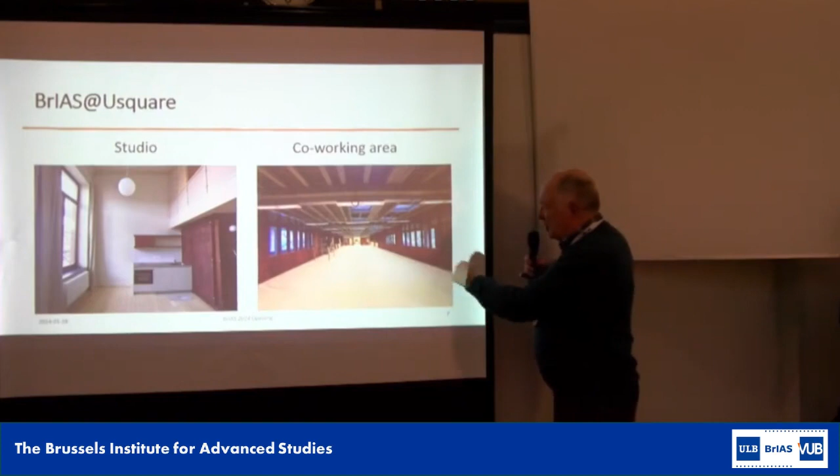I have just a few pictures to show you the actual state. They're being renovated. You see a studio - this will be the co-working area. This will be an ideal setting for people to live together, to work together, to interact, to discuss, etc.

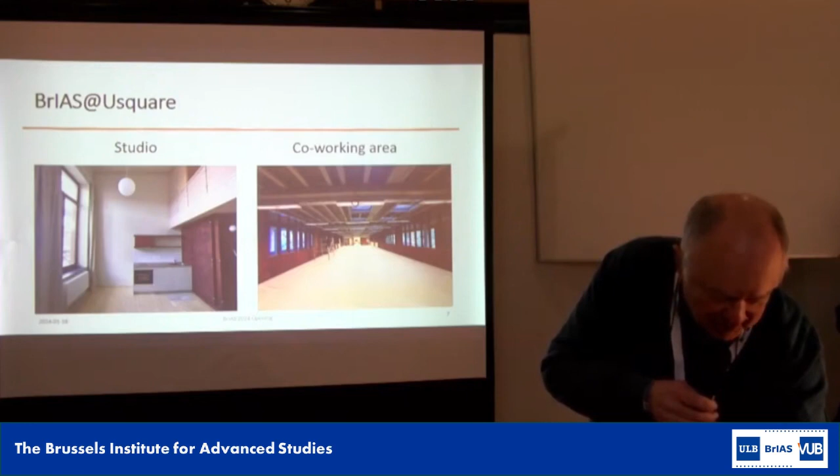So we really look forward to the new setting, which will be available, as I said, probably from May on, and certainly December. Now, I wanted to keep it short. I did not resist on showing you a robot snowman. And by special request, I also show this drawing, the illustration for the last workshop, normally, of BrIAS in May on agriculture. Apologies to the artists in the room for the quality of the images.

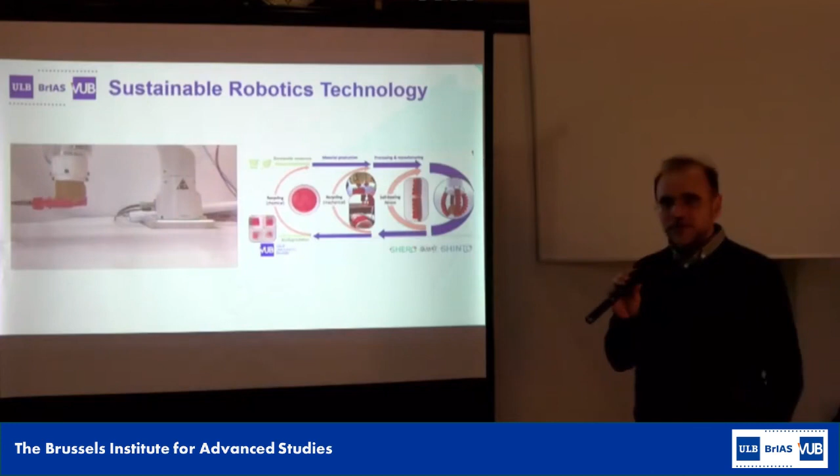A second subject, and here some other video concerning what we mean by sustainable robotics technology. Here there is work from my colleague Bram Vanderborght from the VUB concerning robots that can self-heal, so that they can inherently last longer and survive injuries and bad treatment, and at the end be more sustainable in terms of usage.

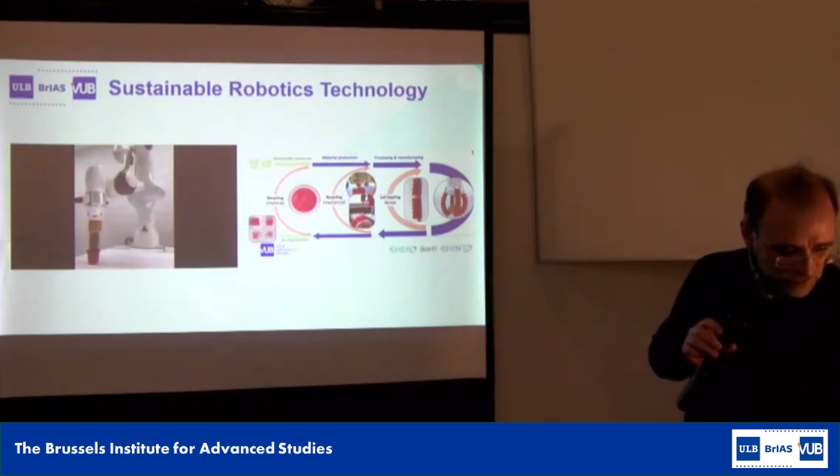Fourth subject, as we said, war and peace and robotics. The previous videos and images were all work done either in this lab or in the labs at VUB. This is the only image in the presentation that comes from the internet because we don't work on this kind of application. But we believe it's important to raise awareness and understand that there is a complex debate concerning the use of robotics in war.

That's a debate that cannot be left only to professionals of politics. It's a debate in which academia must have a role, must bring its position, its viewpoint, and actually must also be the place where different opinions meet and where we can have a constructive dialogue on the subject.

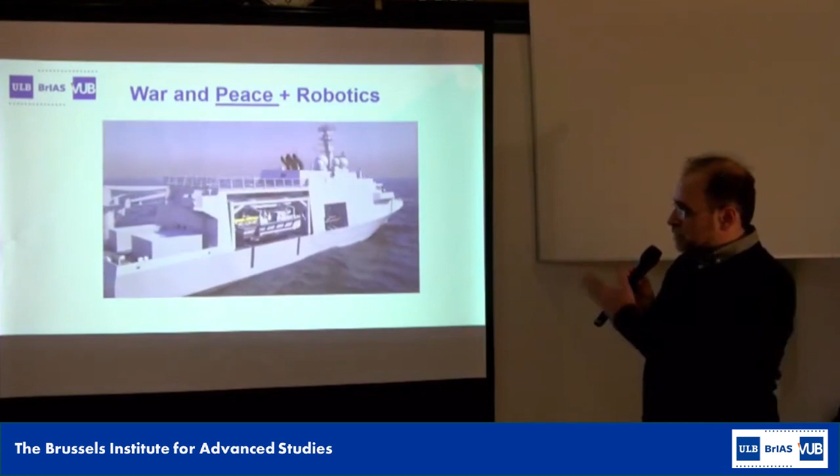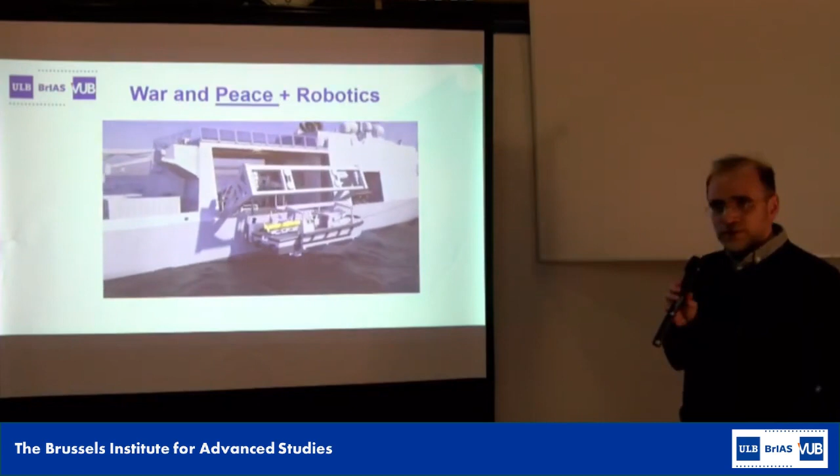This is basically the new generation of minehunters of the Belgian Navy. The idea is to use a lot of robotics in such a way as to do the demining with as few people as possible involved with underwater mines that could explode, which would not be the nicest thing on Earth. The idea is to do demining in a faster and safer way. So you can see what I meant by positive aspects and negative aspects. Okay, so this is an overview of the theme.

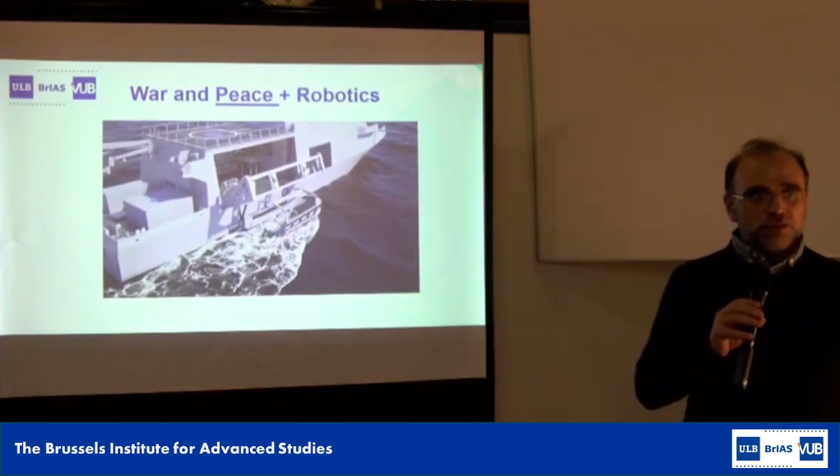Now let's speak a little bit about organization. So first of all, the people involved.

You already had the possibility to meet the two BrIAS directors, Professor Van Deconinck and Professor Jaumain. We also have a new BrIAS manager, Dr. Garone. We have the new program directors, myself and Professor Vanderborght, and two program co-directors, Dr. Mork and Dr. Jacobs.

We also have a special advisor from the Royal Military Academy, Professor Geert De Cubber. Besides that, we have the involvement of many professors and even more postdoctoral researchers and PhDs, many of whom are in this room today.

I also want to mention that these activities will be carried out with FARI, the Center for Artificial Intelligence for the Common Good. It is another joint activity between ULB and VUB, with collaboration from the Royal Military Academy.

This year we will have 16 senior fellows from 12 different countries and 9 junior fellows, most of whom come from ULB, VUB, and universities not too far geographically from here.

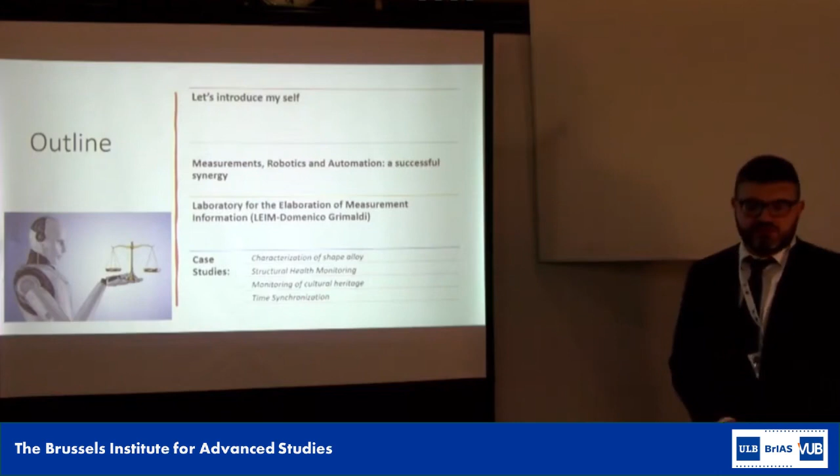This is me. I'm Associate Professor of Electrical and Electronic Measurements at the Department of Computer Engineering, Modeling, Electronics and Systems at University of Calabria. I achieved the National Scientific Qualification as full professor in electronic measurements in 2020.

I'm the director of the International Scientific Journal ACTA-IMEKO, editor-in-chief of the Diamond Open Access Journal of IMEKO, the International Measurement Confederation. I'm senior member IEEE and belong to the Instrumentation Measurement Society. I'm vice president of Commission A, Measurements for Electromagnetic Fields of URSI, International Union of Radio Science, Italy section, and I was president for many years.

I'm fellow of BrIAS, thank you. I'm president of the Commission for the Management of the Informative System of the Italian Group of Electric and Electronic Measurement, GMEE. I'm president of the IMEKO Commission for Publications, and I'm associated with the National Research Council, CNR Nanotech.

I'm the scientific coordinator of the research unit in electronic measurements at the University of Calabria, and serve as general chair of the IEEE International Workshop on Metrology for Living Environment. I'm responsible for several projects, and for many years I am in the ranking of Elsevier and Stanford among the top 2% of scientists with highest impact. So thanks to them for this.

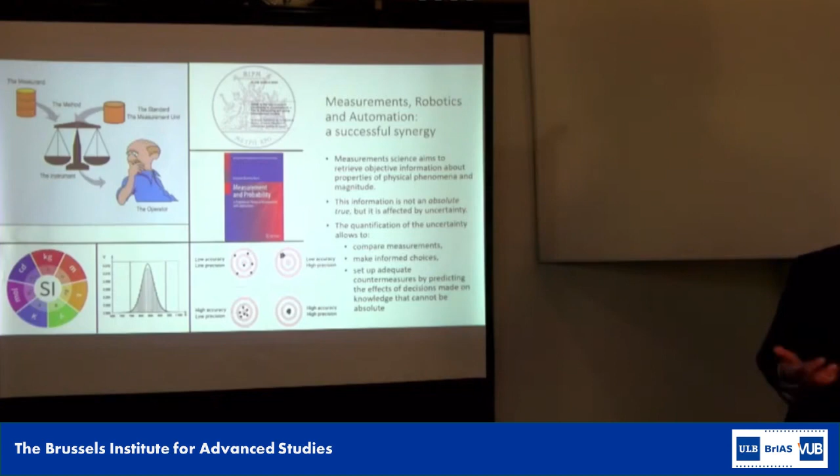So we need to deal with this uncertainty, and we deal with it using a probabilistic approach. This is in the GUM, the Guide to the expression of Uncertainty in Measurement. And we need to quantify this uncertainty.

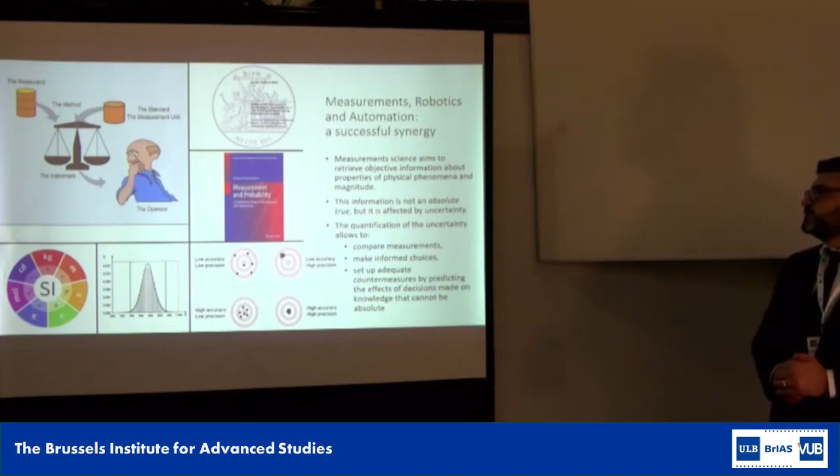This is to compare measurements, to make informed choices, to set up adequate countermeasures by predicting the effects of decisions made on knowledge that cannot be absolute.

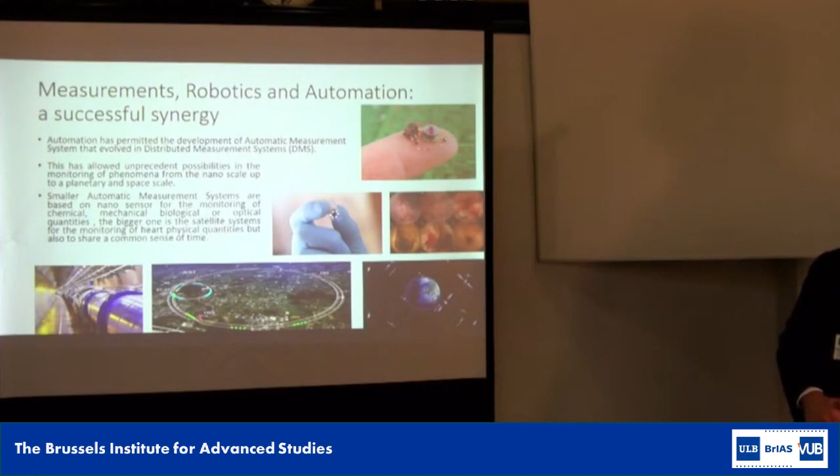Automation has permitted the development of automatic measurement systems that evolved into distributed measurement systems. This has allowed unprecedented possibilities in the monitoring of phenomena from the nanoscale up to a planetary and space scale. Smaller automatic measurement systems are based on nanosensors for the monitoring of chemical, mechanical, biological, or optical quantities.

Some of them are implantable. The bigger one is the satellite systems for the monitoring of Earth physical quantities, but also to share a common sense of time.

Robotics has permitted the development of advanced automatic measurement systems for inline inspections. Unmanned systems are mobile measurement platforms able to automatically detect the best conditions to execute the monitoring and to access dangerous or less accessible sites.

Unmanned systems are equipped with sensors, containing all the measurement chain of signal conditioning and processing up to the extraction of measurement information. But what is the open problem for my scientific community? It is the metrological characterization of this new measurement device and system.

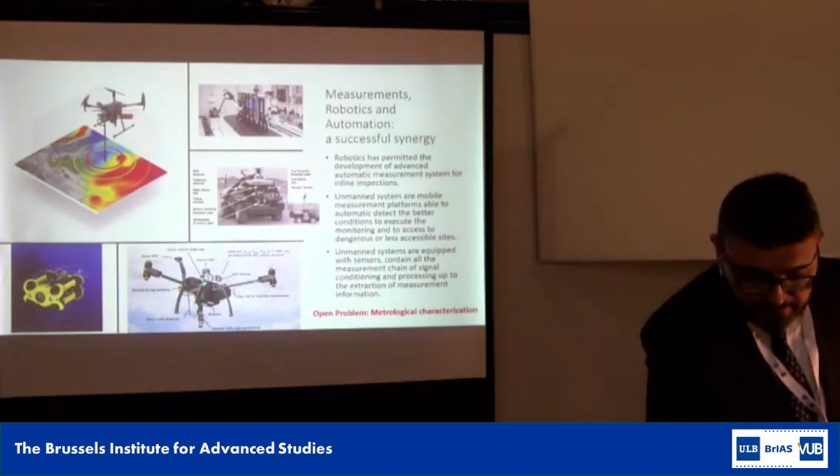However, this successful synergy, in my opinion and in the opinion of many colleagues, is the key factor to achieve the end goal.

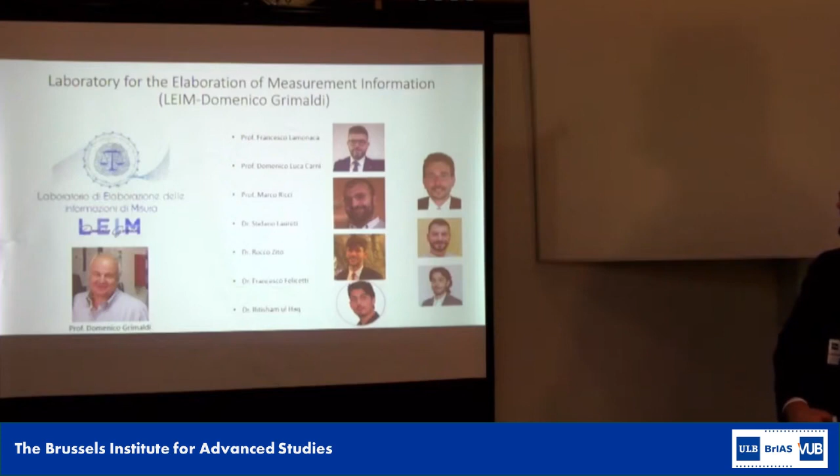This is the laboratory of elaboration of measurement information, Domenico Grimaldi. There is me, Professor Luca Carni, he's Associate Professor of Electronic Measurements, Professor Marco Ricci, Dr. Stefano Laureti, Rocco Zito, Francesco Felicetti, and the new PhD, Istam Ul Haq.

And all of us work on measurements, of course, but also on the extraction, the design of non-destructive testing methods. These are the last projects that we are going on.

Tech4You - I think you have heard about PNRR, the National Plan of Recovery and Resilience against COVID, poverty, and so on. And we have won this project, Tech4You, that has gained 22 million euro, one of the biggest in Italy.

Sustainable data-driven manufacturing, Radiomica, an open network for cooperative radiomics and radiogenomics based on artificial intelligence. Oceanos, monitoring crops and coastal marine areas with new generation satellite technologies. Extendable, a network of extended reality-enabled laboratories for remote practical training. And the last one is the PRIN, the Italian factory of micromagnetic modeling and spintronics.

About Extendable, it's not only a network of laboratories, but this is the way to open the door to students that maybe are far away and cannot have the opportunity to reach the university, to make in a virtual environment real experiments, so to access the laboratory.

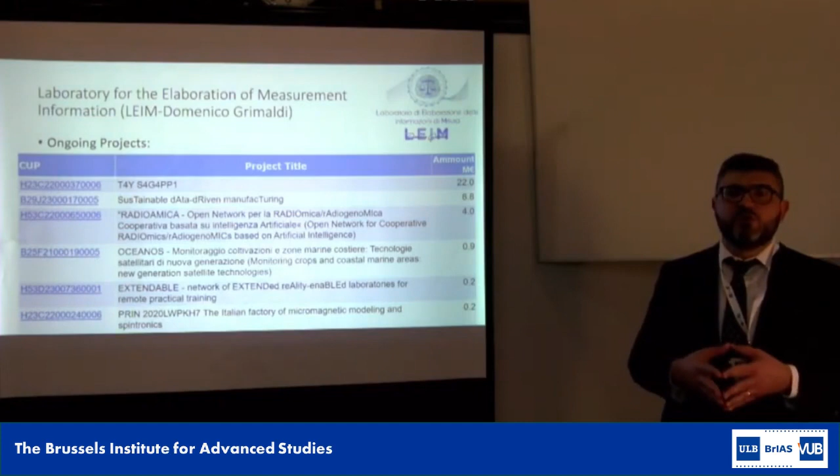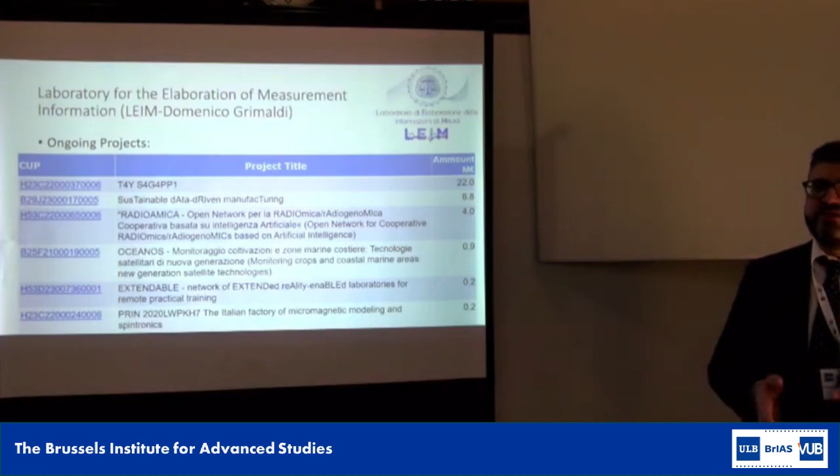And this is the way to address differences, for example also gender differences, because often women don't have the opportunity to attend laboratories due to time constraints, due to family, due to children, and so on.

This is about the characterization. I will start with a case study that is the characterization of shape memory alloy wire resistivity. Why? First of all, maybe it must be on.

What is nitinol? Why shape memory alloys? Shape memory alloys are a unique class of alloys that have the ability to remember their shape. I mean that they return to that shape even after being bent.

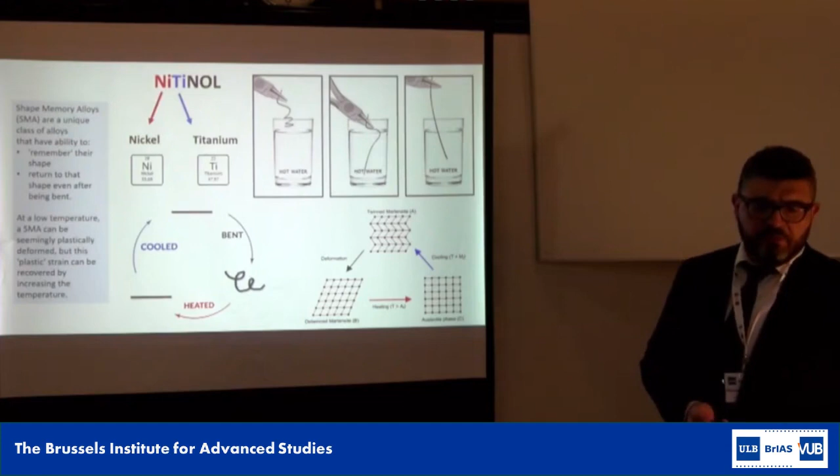At low temperature, a shape memory alloy can be seemingly plastically deformed, but this plastic strain can be recovered by increasing the temperature. We have used and studied nitinol, Nickel Titanium Naval Ordnance Laboratory, named after the laboratory where it was developed in 1959 by William Buehler.

Why this? Because upon returning to the original shape, these materials generate a significant force and are suitable for the creation of actuators, such as in the form of wires or springs. The applications of these materials range from development of artificial muscles for humanoid androids to the production of surgical stents and even the creation of wheels particularly resistant to deformation, installed on rovers used in space missions.

But it can also be used, for example, in automotive applications, because this allows changing the shapes of parts of the car or motorcycle without using engines.

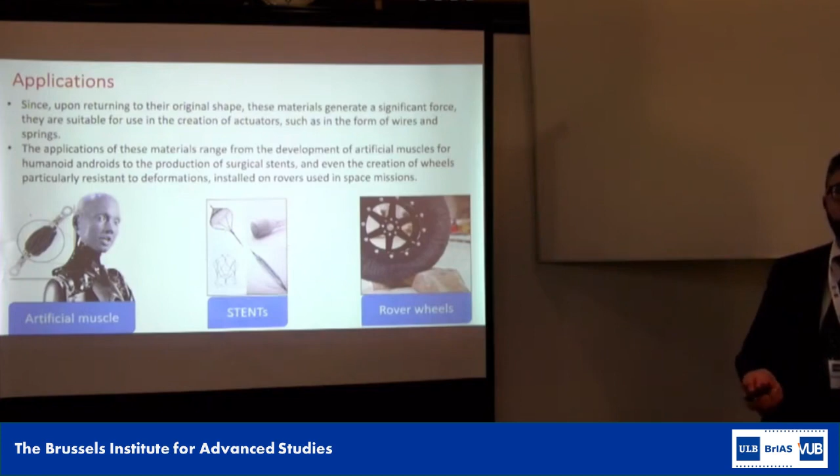So, what is the goal? The goal is to use nitinol to realize actuators with self-sensing capabilities. In order to do this, we need to know with high accuracy the relationship between material transformation, resistivity, and temperature, under different stress conditions. So our proposal is to set up an automatic measurement system to establish the relationship between resistivity and temperature of a nitinol wire under various stress levels.

And now the measurement problems. This is the case of measuring a low value resistance. Usually for this case, a Thomson double bridge is used. But we cannot do this because in order to heat the wire, the most accurate way is to use the Joule effect, meaning we use current to heat it. And in this case, the Thomson bridge cannot be used.

So we selected the voltammeter technique. Although from a theoretical point of view, putting the voltmeter before or after the ammeter is the same thing, due to the fact that the internal resistance of the ammeter and voltmeter is not zero or infinite as the theory wants, we need to make a proper selection. And of course we used the voltmeter after the ammeter because this allows us to have the highest accuracy.

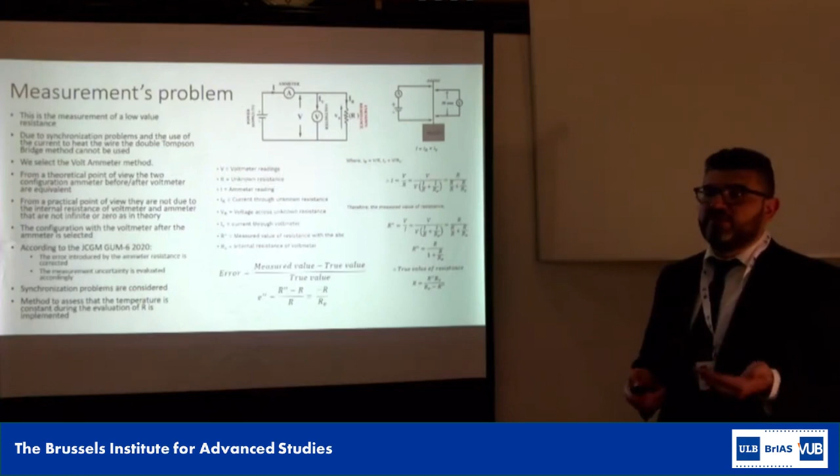But there are other problems we need to deal with. For example, the synchronization of the measurement procedure and checking the wire temperature before and after the measurement procedure, because we need to synchronize the acquisition of voltage and current to evaluate the resistance and then the resistivity.

Synchronization, however, introduces a delay. We have uncertainty on synchronization. And in order to assess that this uncertainty produces a negligible effect on what we want to measure, we need to evaluate that the measurand does not change during this time.

Another problem is that resistivity depends on the length of the wire we want to measure. In this case, the length changes during the measurements, as is typical of all materials, but especially for the nitinol wire. So our idea is to fix the length of the probe and let the wire slide over the probes. We know the distance among probes, and so the length, with an accuracy of 0.05 millimeters.

But more importantly, this uncertainty becomes a constant in our measurement. In this way, the uncertainty with which we know the resistance is the same uncertainty with which we know the resistivity.

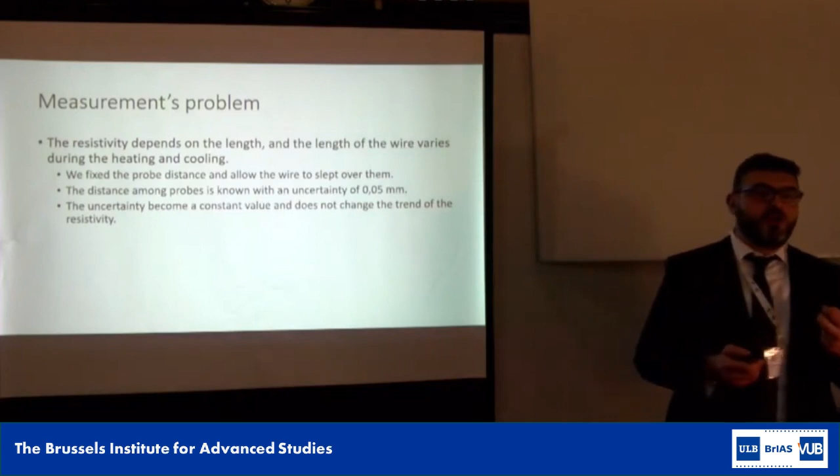This is a block scheme of the automatic measurement system we have proposed, and this is its realization. We have used thermography to measure the wire temperature for two reasons.

First, using probes connected to the wire can change its behavior. Second, we can monitor that there is no difference in temperature along the wire, due, for example, to the fact that we use it in a vertical way, so heating from the bottom can heat up the upper parts more.

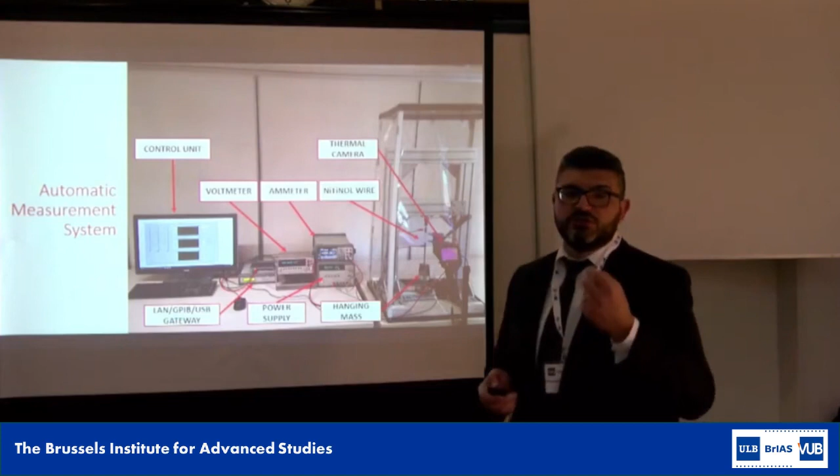But we have to calibrate, so we set up a system to calibrate the temperature measurement, because when you use thermography, you can evaluate a differential temperature on the order of 0.001 Celsius degrees, but the offset you measure can be around 1-2 Celsius degrees. So the uncertainty of the offset is huge.

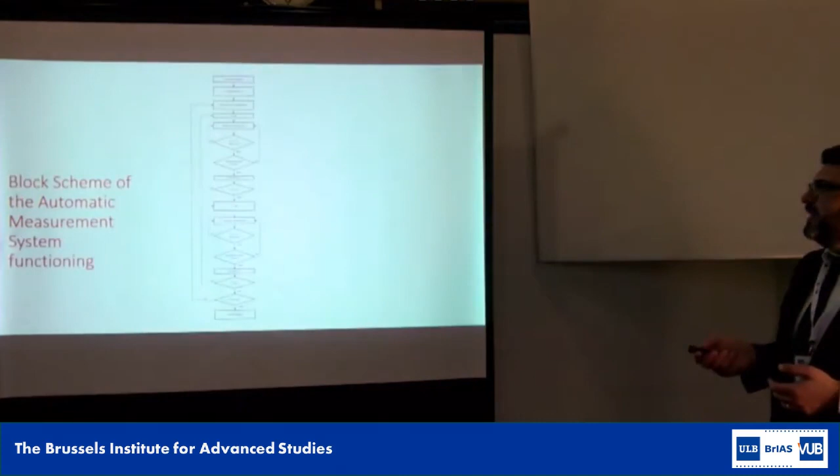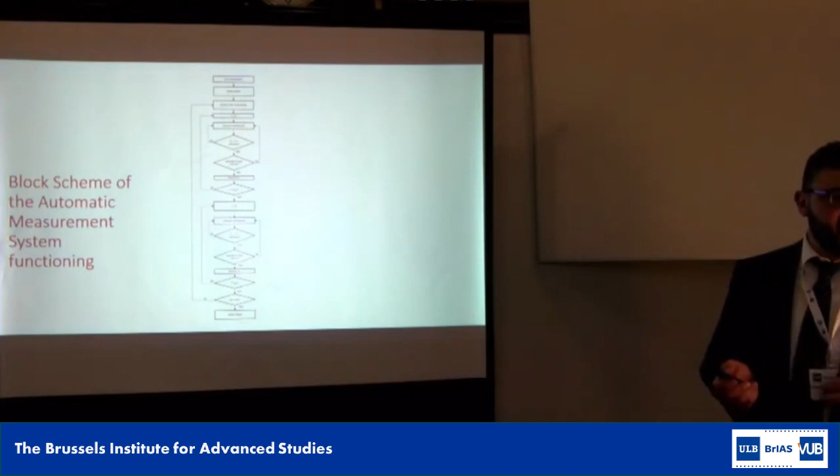So this is the block scheme of the automatic measurement system. Essentially, we are able to perform repetitive measurements during the cooling and heating phases of the wire test.

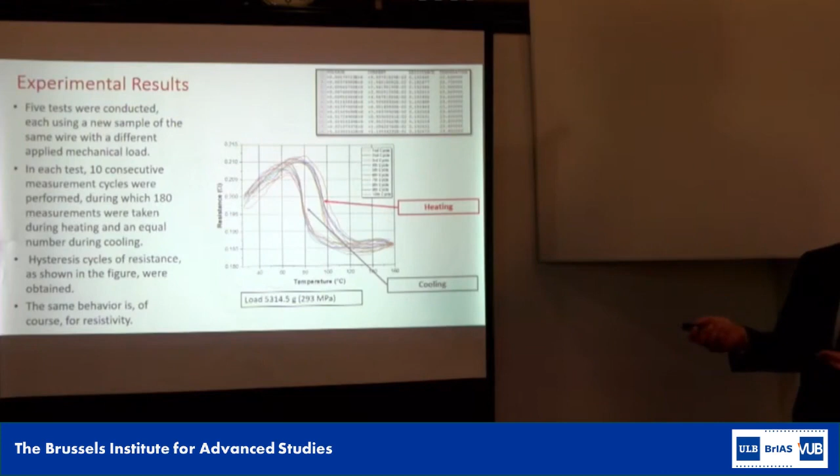The same shape and results apply to resistivity, because length is just a proportional factor. We noticed that by applying a weight, so mechanical stress, these curves change. The transformation temperatures are in direct proportion to the applied stress, and there is a strong dependence of resistivity not only on temperature but also on the applied mechanical load.

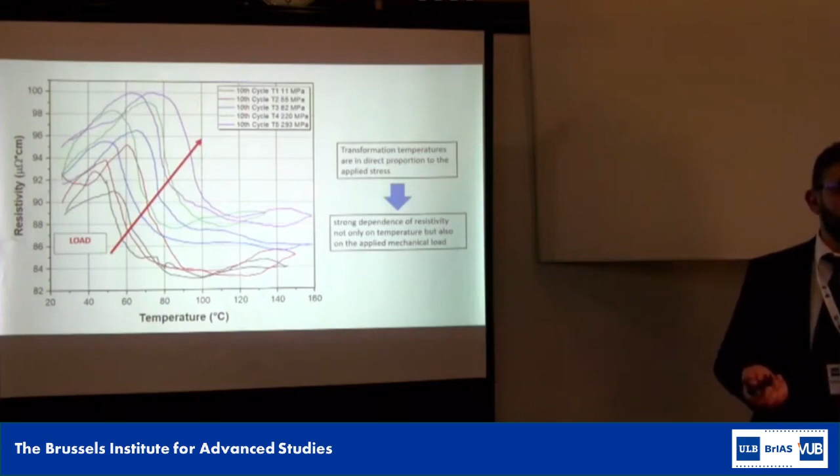These results are promising for using nitinol not only as actuators but also as sensors. As is traditional in measurements, we use interpolation to achieve a global view of the behavior of these materials, also for weights that we have not tested.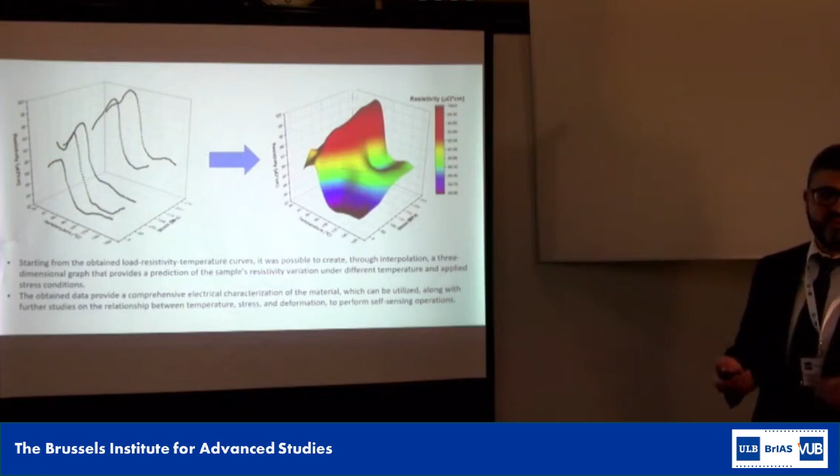As concerns structural health monitoring, in these slides I have tried to summarize some years of research. In particular, what we are proposing is a device that can be installed by robots, especially drones, for example new generation of drones.

What is a crack? A crack is a rupture inside the building material occurring due to stress, aging, and other damaging factors. It can be visible or hidden.

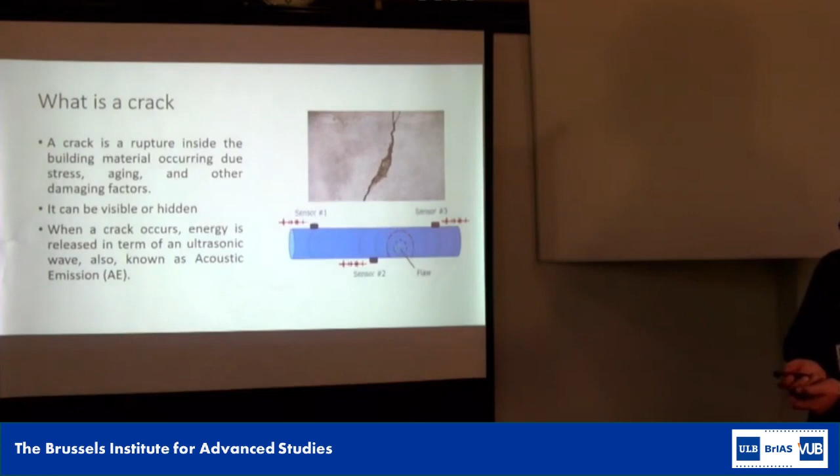When a crack occurs, energy is released in terms of an ultrasonic wave, also known as acoustic emission. So we can use sensors such as piezoelectric sensors to detect it. The advantage over traditional techniques, for example ultrasound techniques, is that this approach does not need actuators, so we can save energy, which is fundamental for an IoT approach, for example.

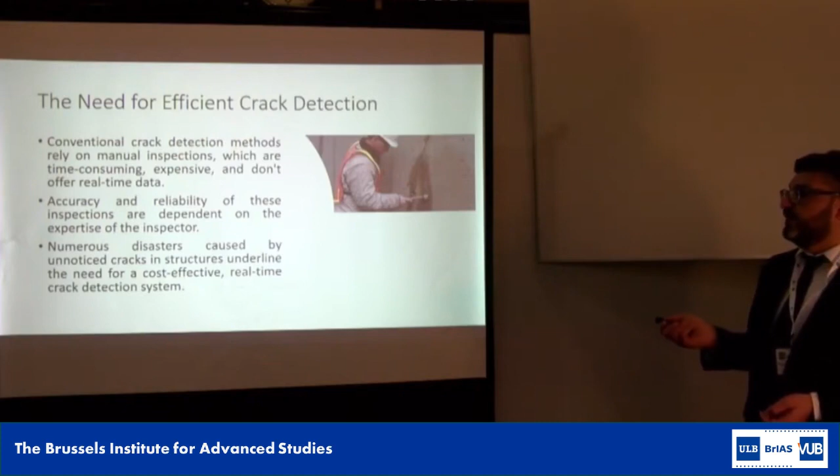Conventional crack detection methods rely on manual inspection, which are time-consuming, expensive, and do not offer real-time data. Accuracy and reliability of these inspections are dependent on the expertise of the inspector. Numerous disasters caused by unnoticed cracks in structures underline the need for a cost-effective real-time crack detection system.

For example, the Silver Bridge collapse, the Mississippi River Bridge, the Genoa Bridge, and the most recent in 2023, the New York City car park collapse.

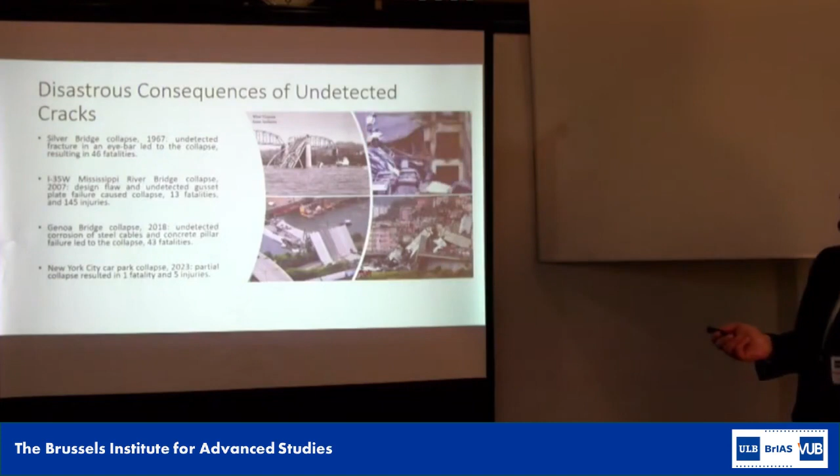We use GPS and the exchange of messages, in case these systems are placed inside buildings, in order to synchronize them. They are able to acquire the signal, process the signal, understand if the signal is significant or not, and send an alarm to a central station to be processed.

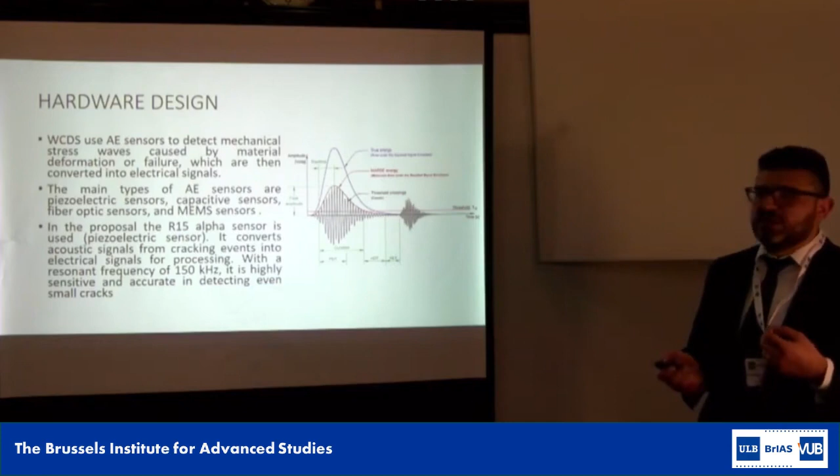What we have done—I'll skip some technical slides—we used the R15 alpha sensor. It's a resonant sensor at 150 kilohertz, because in this way we can increase the sensitivity of the sensor.

From this we extracted information using previous destructive tests, in order to understand and distinguish important acoustic emission signals from other acoustic emission signals.

It's like with an earthquake: we have the first shake, which is the most important, with full energy, that may be preceded or followed by other shakes that are less important. So we have used the same technique that is used for earthquakes.

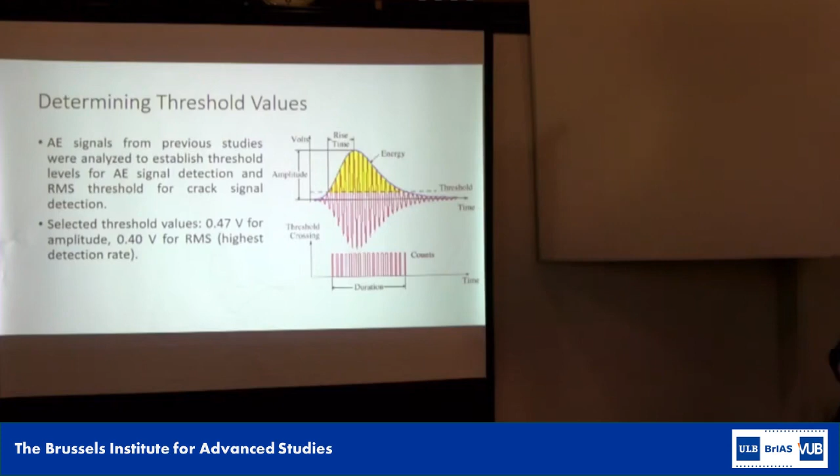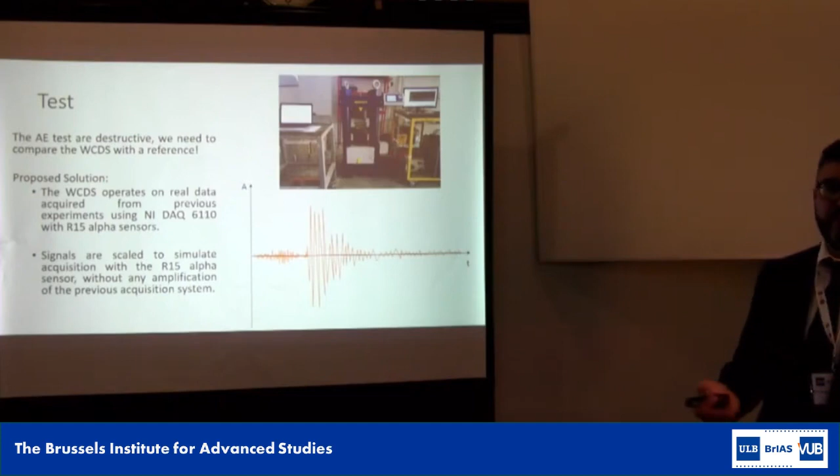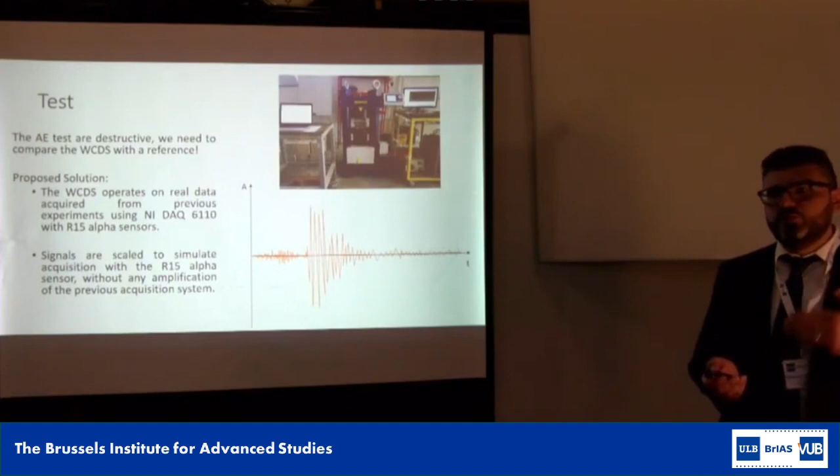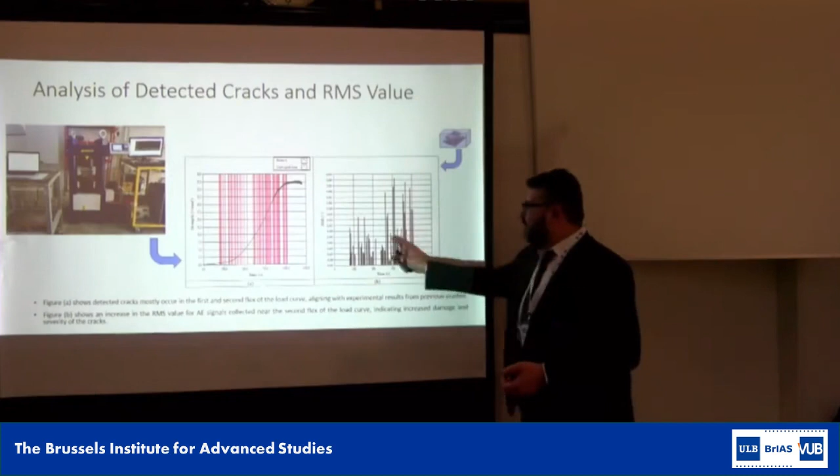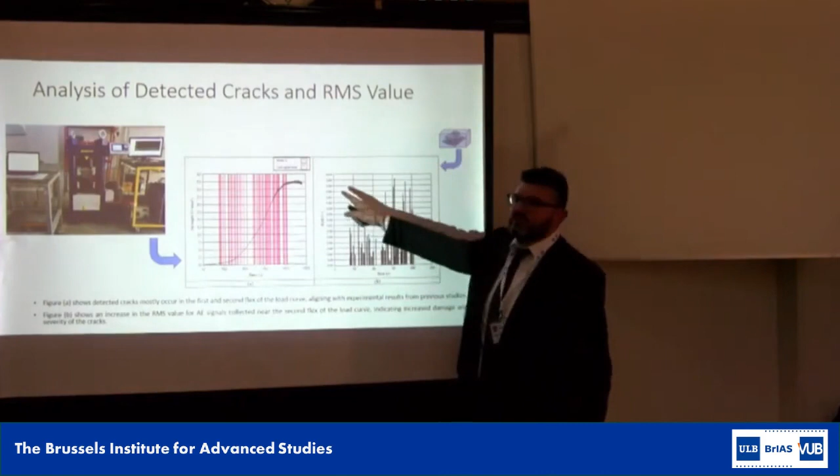And as you can see, with our hardware, we can monitor this, and we can detect this signal exactly at the first and at the second flex. So this hardware is suitable for this purpose.

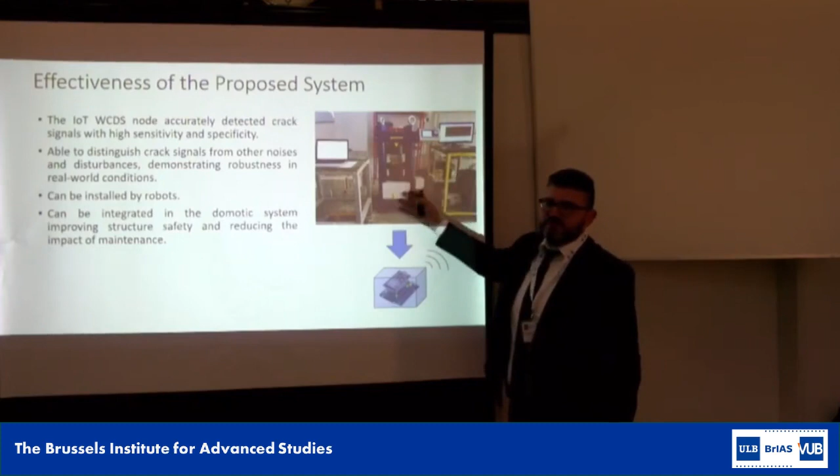So essentially with this last research, we have condensed all the information coming from these systems into these systems. Here are some readings, and from these studies, developed together with other colleagues, we had the idea for this next topic.

This is the IEEE International Workshop on Metrology for Living Environment. The first edition was in Cosenza, in Calabria, at my university, with 100 participants in presence and another 50 online, and about 90 accepted works. The second edition was at Polytechnic of Milan. Now the third edition will be in Chania, Crete. So if you are interested in these topics, or working on these topics, you are welcome. I'm serving as general chair for all these editions.

Second case study is the monitoring of cultural heritage. This is the one supported by the PNRR project Tech4You.

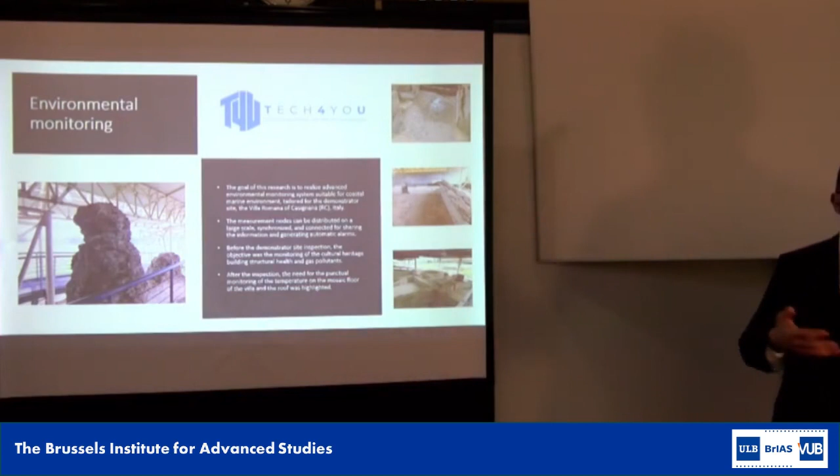What they did to save the mosaic from weather conditions is to build a roof. But the problem is this: if the temperature difference between the mosaic and the roof exceeds 6 Celsius degrees, the tiles of the mosaic start to break. So what they asked us is to develop a monitoring system to detect the temperature difference between the roof and the mosaic.

Another problem, also a measurement problem, is the visible impact of the measurement system. People who come to visit the villa have to pay attention to the mosaic, not to the device that we install.

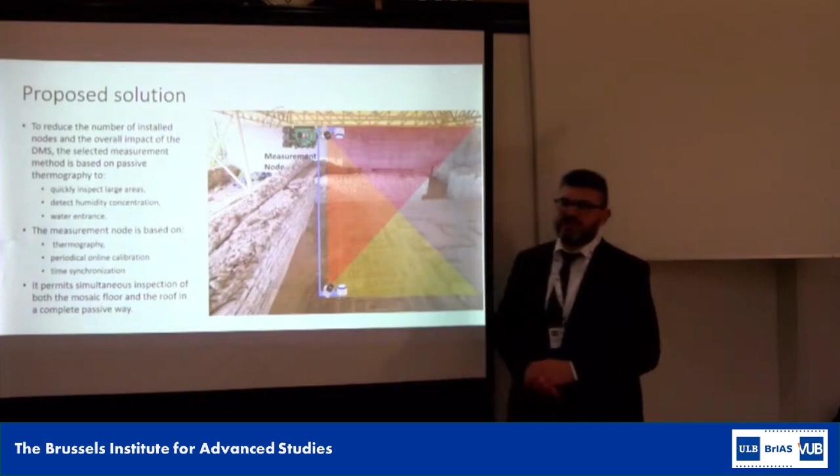So what we have designed is this distributed measurement system. A single node of the measurement system is made of 2 thermal cameras, Lepton modules, about the size of a pencil eraser. We have added an absolute temperature sensor as well, because, as said before, this is the final goal we want to achieve. All these nodes communicate to a gateway, then to the internet, and then to the research center, to the control room, and so on.

This is the hardware that we have pointed out. This is the size of the Lepton.

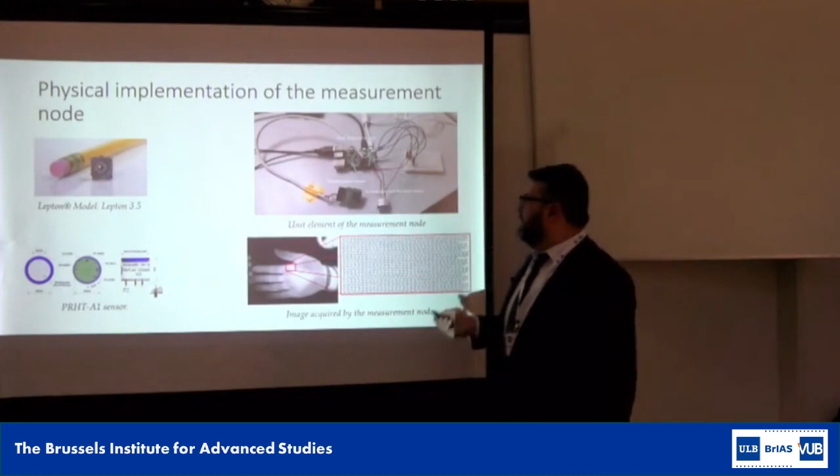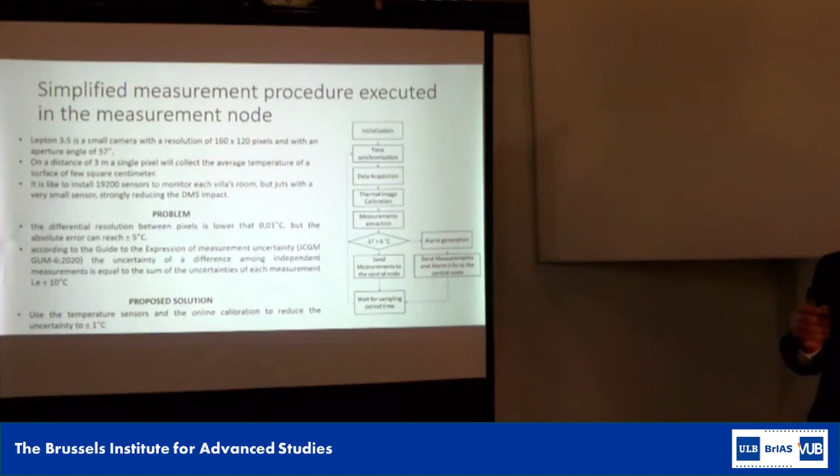But the problem here is that the uncertainty on the offset value of the thermal image we achieve is plus or minus 5 degrees. Since we measure a difference, the uncertainty on the difference we want to measure is 10 degrees, meaning the uncertainty is bigger than the value we want to evaluate. So we propose an online calibration system based on the temperature sensor, and we have reduced this uncertainty from plus or minus 10 degrees to plus or minus 1 degree. This is acceptable, but we are working to reduce it further through a series of calibrations.

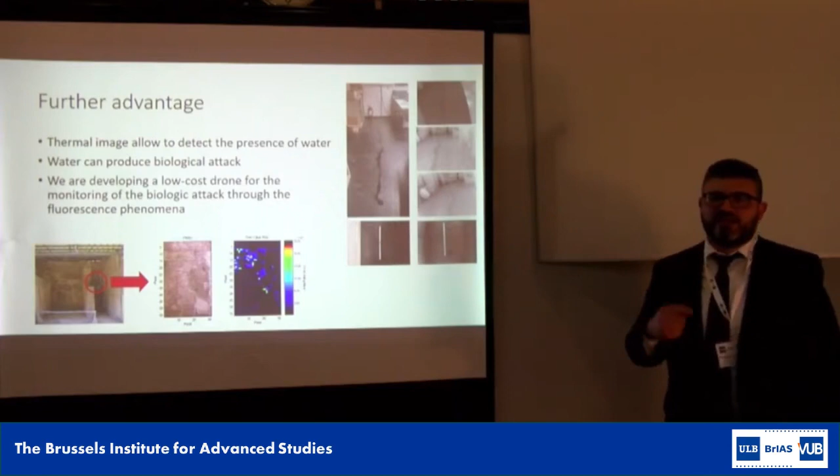We achieve another advantage by using thermography, and it's the impact, because one node is like putting 600,000 sensors on the floor, and we can detect water. Water is a huge problem for cultural heritage because water brings life, and life means biological attack.

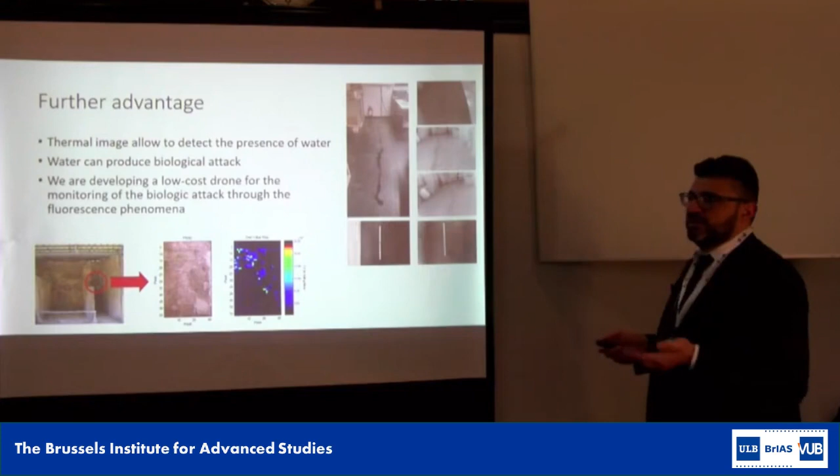So the main idea is to detect water, then send a drone equipped with ultraviolet light to acquire visible light in order to detect if there is life on the mosaic, and then program an intervention to clean it. Another big advantage is online monitoring and constant monitoring, which means to timely act. Timely acting means preserving our cultural heritage, but also reducing the chemicals needed to clean it.

Some readings. We have just started a collaboration with the urbanistic group and geomatic group of my university. I have drones with multispectral capability, the DJI Phantom Multispectral, and others with LiDAR, in order to create a database where we can use artificial intelligence to extract information about building damage in a completely non-invasive way.

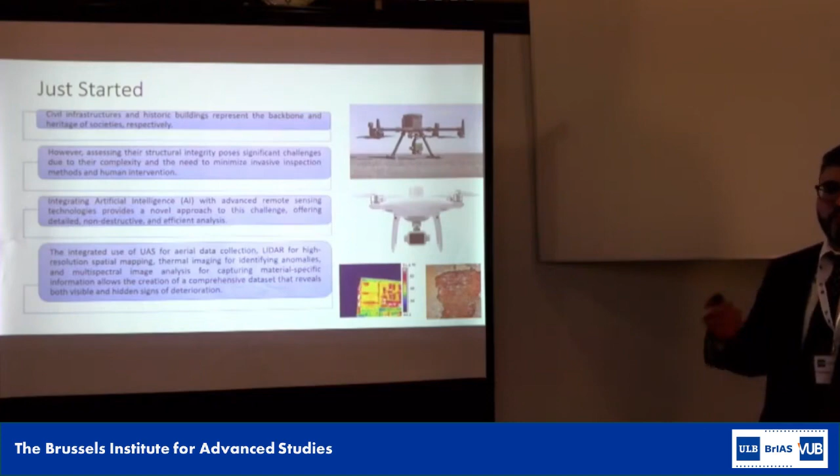So, some advantages. Finally, I bring to your attention the problem of clock synchronization. Why clock synchronization? Because in distributed measurement systems, and often in robotics, we need to act with several agents, several measurement instruments, for example because we want a measurand that is huge, or we need to monitor it, or we need to perform indirect measurements.

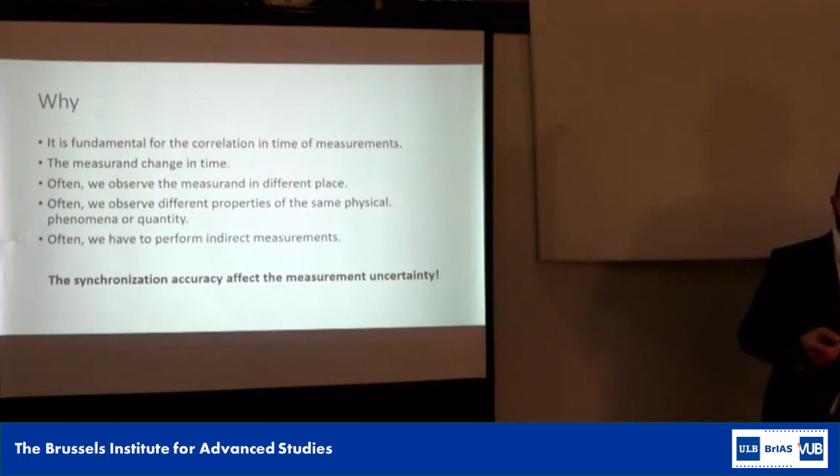In indirect measurements, as in the first case I brought to your attention, we assume we are doing synchronized measurement. In this case, the uncertainty on synchronization is reflected into the uncertainty with which we know the measurand.

In standard synchronized distributed measurement systems, we can use GPS, we can use the precision time protocol IEEE 1588, or we can use a trigger signal that propagates, allowing us a delay that we can know about. It depends essentially on the length of the cable.

In the case we use a wireless sensor network, which can include mobile nodes such as drones or UAVs, these techniques cannot be used, and often we use message passing techniques instead. We can monitor different phenomena, and the accuracy we want to achieve depends on the dynamics of these phenomena.

The problem is that, together with Emanuele, when I was a visiting researcher here some years ago, we demonstrated that synchronization accuracy increases with the number of exchanged synchronization messages. But increasing the number of exchanged messages means consuming a lot of energy, so if you're using a battery-based node, you reduce the lifetime of your measurement system.

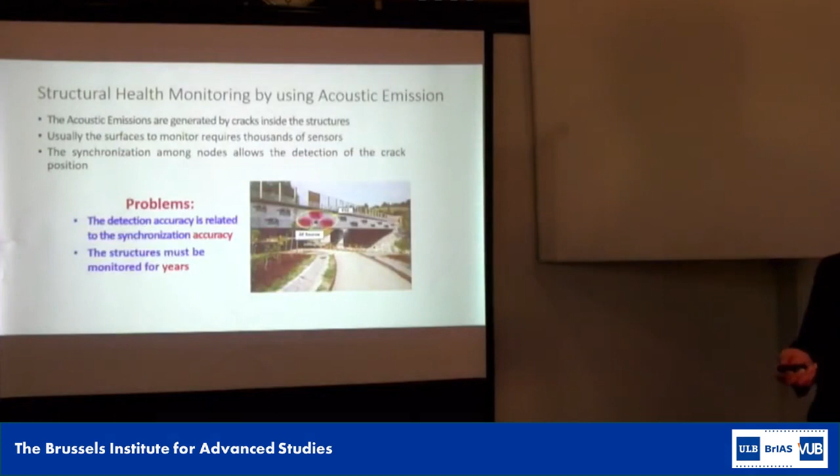A case is, for example, monitoring a bridge, in which, in the case of acoustic emission, this emission will be heard or sensed only by some nodes. So the main idea with Emanuele was: why do we need to synchronize all nodes with the same accuracy? We only need to synchronize with high accuracy the nodes that are doing the measurement.

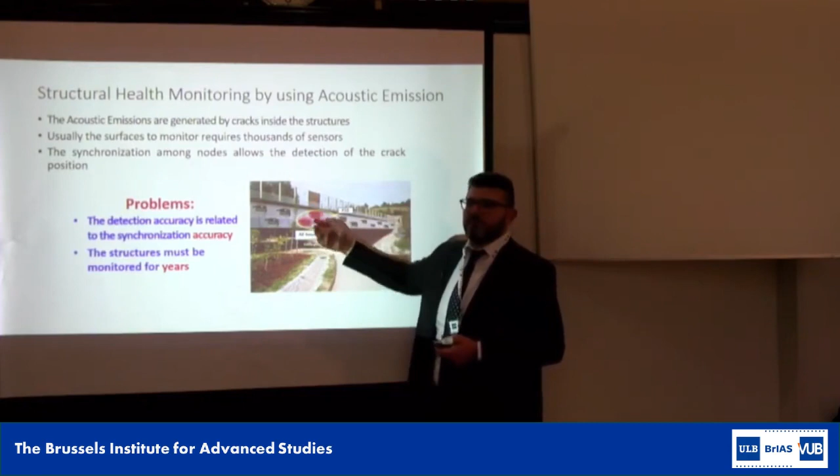So we proposed to split the nodes into a fine synchronized subset and a coarse synchronized subset, which reduces the energy consumption of the nodes. The idea is to point out an automatic way with which a node can change from quiet to alert and from alert to quiet, while maintaining the synchronization accuracy required for the wireless sensor network to function.

For example, if you want to go into sleep mode and wake up to exchange messages only within a certain window of time, it means we need to share a common sense of time—again, we need to be synchronized. The duration of this time window depends on the synchronization accuracy that I choose.

The synchronization of these nodes must be fast in order to increase monitoring accuracy, light due to the limited computational resources of the node, adaptive due to the unpredictable occurrence in space and time of the phenomena, and decided by each node in an autonomous way.

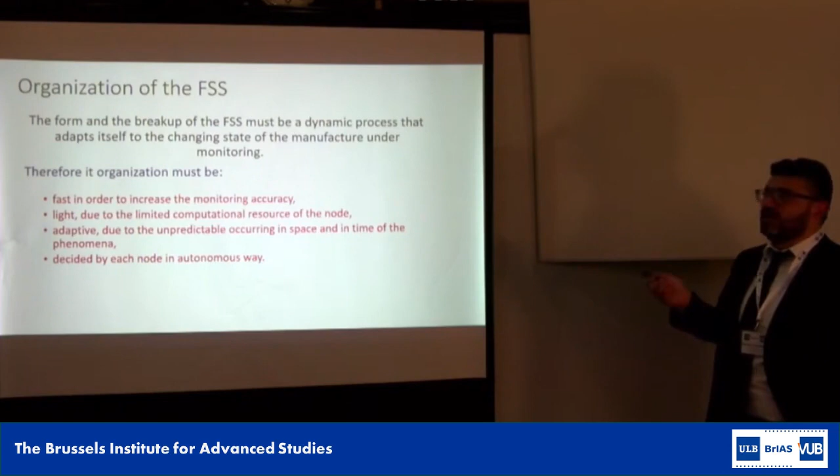Master-slave synchronization algorithms fail in this case, for example, because the master could not belong to the fine synchronized subset. Moreover, this kind of algorithm needs a logical structure, and when they lose this logical structure, for example because a node is missing, they need time to reconstruct it. Another problem is that the logical structure may differ from the geometrical distance among nodes.

So, we have based our research on consensus synchronization algorithms. In this case, the common sense of time is established by the interaction among the wireless sensor network nodes to reach agreement consensus on a common sense of time.

This kind of algorithm is resilient to node failure or reallocation, but what we need is that communication among all nodes must be granted. This doesn't mean that all nodes must communicate with all other nodes; it just means that the graph must be fully connected.

So the average time sync algorithm was the basis from where we started. This allows us to compensate clock offset and frequency. It is robust to packet loss. The convergence was demonstrated and experimentally tested.

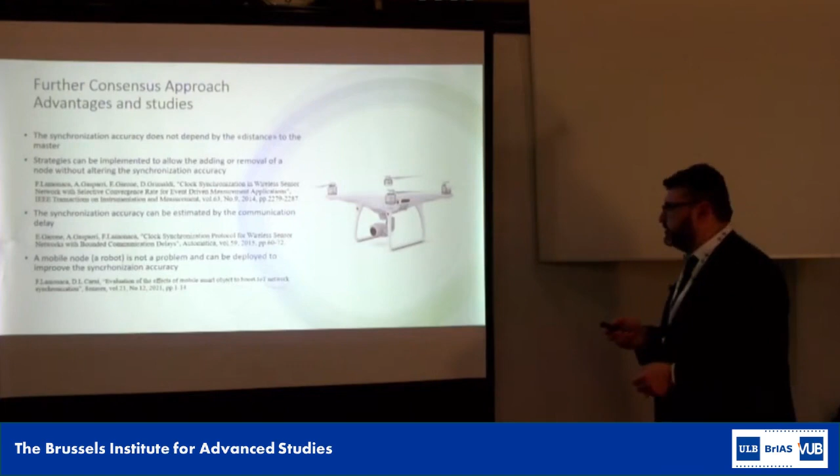We have seen that mobile nodes not only do not create problems for the convergence of the network, but can also be used to speed up the convergence time and reduce the time synchronization uncertainty. These are some readings, and in this slide I've added it just to show that we are working.

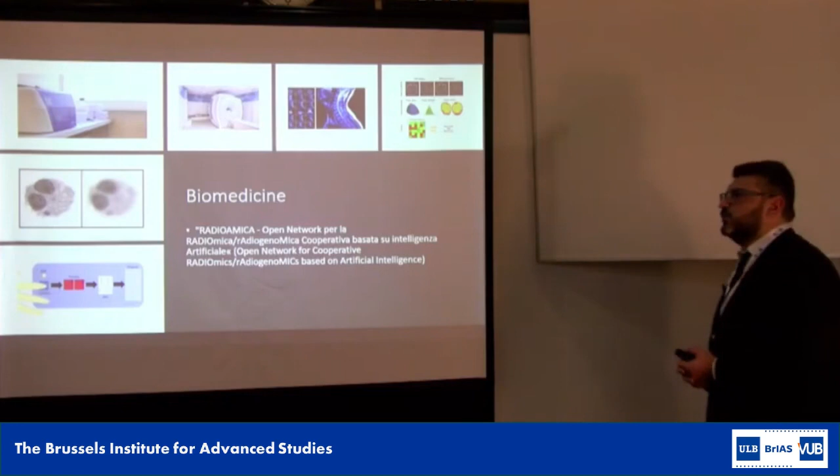I've started with biomedicine. In particular, in this case, what is the problem? We worked on a new kind of flow cytometer that is able to detect also the image, because traditional flow cytometers just detect the shape and some geometrical properties of the cell, the automatic counting of the cell. In this case, it is able to take pictures of the cell.

And why are we interested in the picture? Because we used this device, which was developed together with the National Istituto Pascale Tumori of Naples.

Human lymphocytes are very sensitive to carcinogenic agents. We can see this because during the mitosis phase, part of the genetic material, instead of being doubled and contained in the two nuclei of the two daughter cells, appears as micronucleus. So if you are able to count the micronucleus and quantify their size and surface, then you know the probability, the strength of the carcinogenic agents on the human body.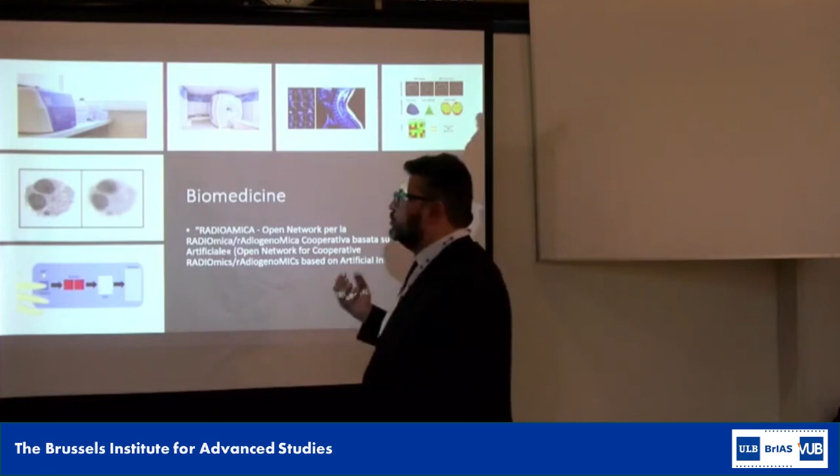The problem that we had, which gave the start for the new project Radioamica, is this: okay, we can apply artificial intelligence, we can apply several vision techniques and methods, but are we sure that the image we are processing has good quality? So we need to standardize the image quality.

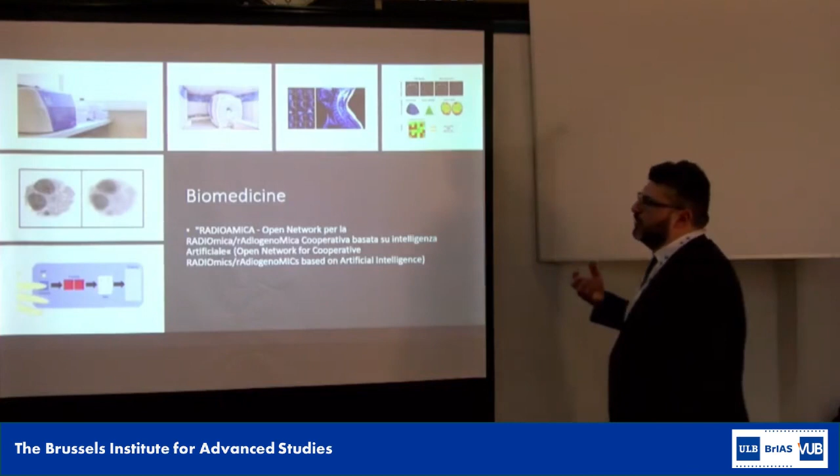In our research, we developed several indexes, measurement indexes, to evaluate the alterations. For example, in this case there is out of focus, but there are several kinds of out of focus, for example blur. But there can be other kinds of alteration, maybe overexposure, underexposure, especially in the case of genomics image, radiomics image, or motion artifacts.

So, all this to say the importance of measurements to give quality to the results that we achieve with other techniques, especially in biomedicine. In conclusion, this talk highlights the synergic efforts of research in robotics, automation, and measurement fields. Measurements serve automation and robotics to retrieve objective information from the world, opening new frontiers of application. At the same time, automation and robotics have opened unthinkable opportunities for measurements, such as automatic measurement systems and distributed measurement systems that nowadays include mobile measurement nodes.

If some years ago the aim of automatic measurement systems was the reduction of uncertainty by avoiding human operator errors and increasing the number of measurements per unit of time, today it is the retrieval of information in places and from points of view inaccessible before: sky, oceans, deep space, and on the other side, inside the body and inside materials themselves. So, thank you for your attention, and if you have any questions, I'm here.

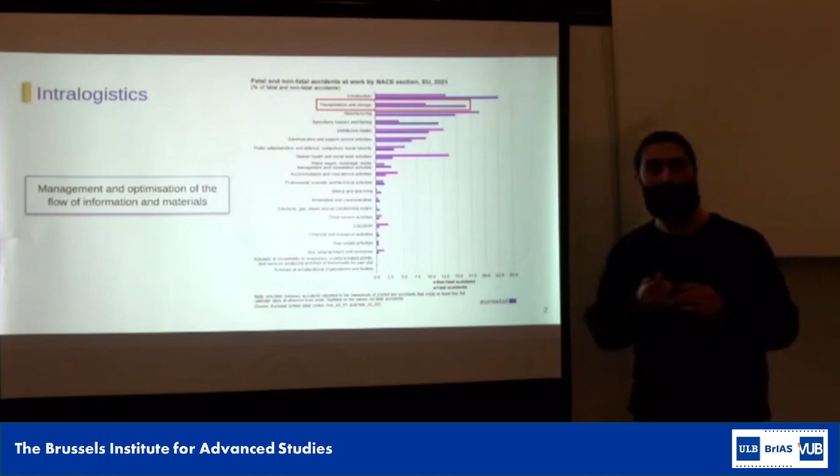If you go deeper into the statistics, this is usually about all the things that happen when you handle heavy things, even with the utmost care, like sprains, dislocation, shock, concussions, and these things. So it's clear that the introduction of robotic systems into such environments could bring some benefits, be it through aiding workers or altogether replacement for handling heavy stuff like packages and pallets and so forth.

So how has robotics actually been introduced into these ideas, particularly more towards mobile robotics I will talk about. So far I will give three quick examples.

One of them you probably know already, the one on the left-hand side. This is what the robots that Amazon uses for distribution centers. They acquired these orange mobile robots from what was back then known as Kiva Systems, now Amazon Robotics. These, I wouldn't call them little guys because they're actually pretty big, but they move along grid lines on the warehouse, and then they can lift these specifically designed shelves with a platform and move them around along these grid lines to move them around the warehouse.

This is very practical. The second example is a shot of the Hive. This was developed by Ocado System, a distributor in the UK. This essentially consists of an array of vertical shafts, and these robots move along rails on top of these shafts, and they can pick items from one place and move very rapidly to another and drop them over there.

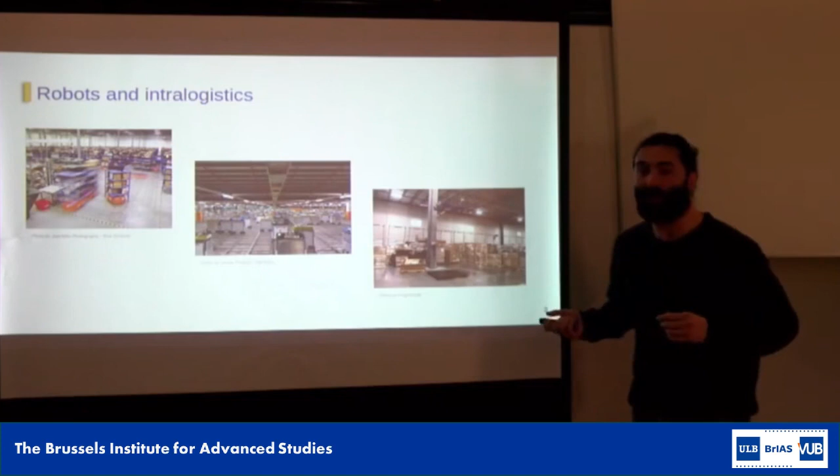In the case of the Hive, it's very obvious you need an entire system developed exclusively for this. But even in the case of the Amazon warehouse robots, you need the specific shelves, the lines, the space. So they're not really suitable for off-the-shelf solutions. Additionally, I can't confirm this because it's rather private information, but they look pretty expensive to me, so I'm going to assume they're not really affordable by the most economically challenged communities.

So how does swarm robotics come into play? Before I talk about how it comes into play, I want to give a quick overview of what swarms are, because robot swarms is an often misunderstood concept, often taken for common or general multi-robot systems. But what we talk about when we say swarms is a collection of relatively simple robots.

But relatively simple means with respect to the task at hand. They operate in large numbers. So here we're talking about from 5 or 10 to 1,000 or several thousands in principle. In practice, 1,024, I think, is the biggest there has been.

These robots coordinate in a distributed manner, so there's no central control entity, and they interact with one another and their environments locally. This allows us to build systems that are highly scalable, so you can add or remove robots without truly compromising their performance. They're fault tolerant, so they can afford to lose some of the members, and they're flexible in the sense that they are supposed to be able to adapt to changing environments or different conditions.

Now, these properties are all very nice to have in a robotic system, but in order to introduce them in intralogistics, we wanted to go a bit further. So how do we actually take these properties and put them to good use in intralogistics?

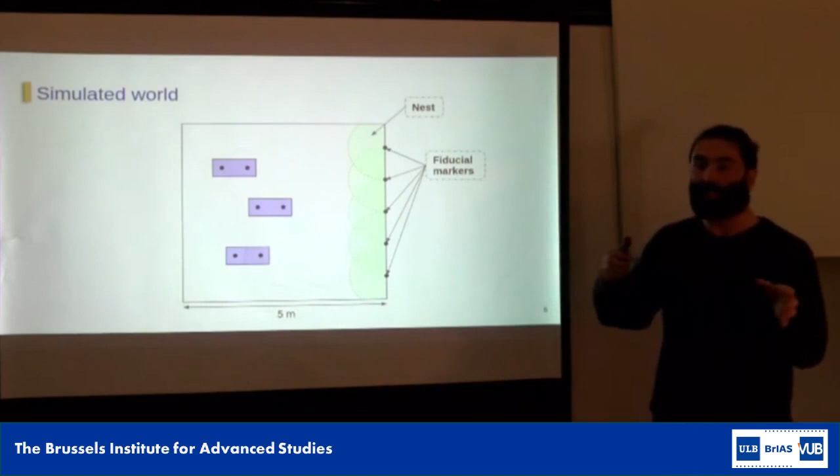Now we consider a very simple scenario. Let's say you have an environment that is 5 meters by 5 meters, and you have a wall covered with some fiducial markers, like ArUco markers, that can be detected, and then the robot can measure the distance to it and basically its relative location.

The idea was to have a swarm of robots that can carry these neat little items towards the nest in a collective manner. These items have two or more fiducial markers that can be detected as the robots travel underneath them, giving the robot information like a unique ID of the platform and the number of porters required to carry them, in this case 2.

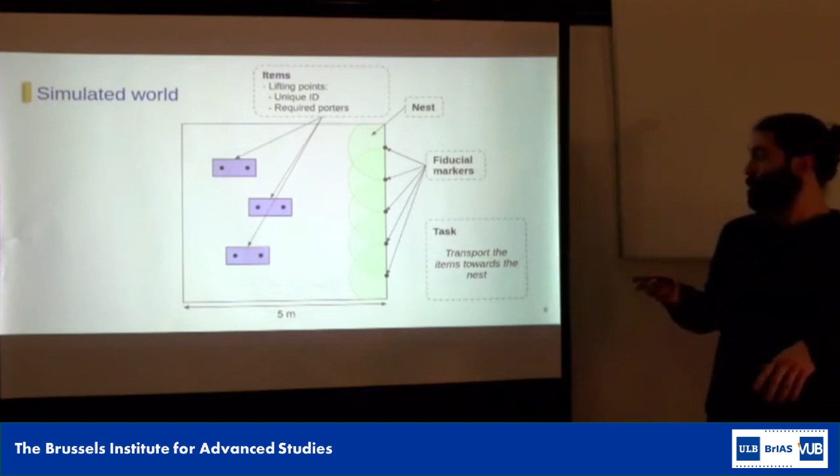So these platforms are designed such that 2 robots are required to move them, and a single robot cannot actually move it. The goal then is to distribute some of these robots, which we made as a simplified version of the DOTS. It has holonomic motion, it can attach or detach itself from the platform, and it also has some fiducial markers around it so that other robots can see and identify it.

And then they have some sensors, like distance sensors, cameras for detection of the markers, wireless communication, and they also have a compass, and they operate in a synchronous manner. Now, this is usually a big concession in swarm robotics, since we assume that the robots operate in a distributed manner without access to a common clock. But as a previous speaker already mentioned, the synchronization of clocks is a rather challenging problem on its own, so here we kind of put it aside and focused on the thing that we wanted to show.

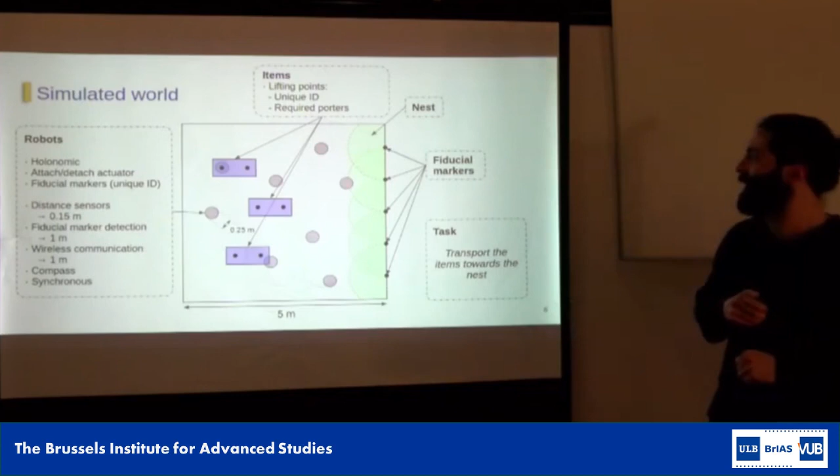So how then did we go on and control this swarm? Now, notice that when I talk about control of a swarm, what I actually mean is how do we control the individual robots such that the swarm does what we want it to do? That is the main problem in swarms, which is not very easy.

Here I'll talk about more of a high-level control than the low-level control that you're probably used to seeing around this lab. So the first stage of this controller was a behavior tree.

So these nodes might tell you that the children will be executed in a sequence, or that there will be one of them selected and that one will be executed. Or you can have a node that is a conditional node, and so the child will only be executed if the condition is true, and so forth.

Now, when the signal reaches the leaf nodes, these leaf nodes can interact with what's known as the blackboard. It's a list of key value pairs that contain information, in the case of our robots, about the environment, about what they sense. So our robots provide information about, let's say, the mean position of nearby obstacles or nearby robots, or the position of the nest, if perceived within its local environment. These leaf nodes can read from the blackboard and write to some entry of the blackboard.

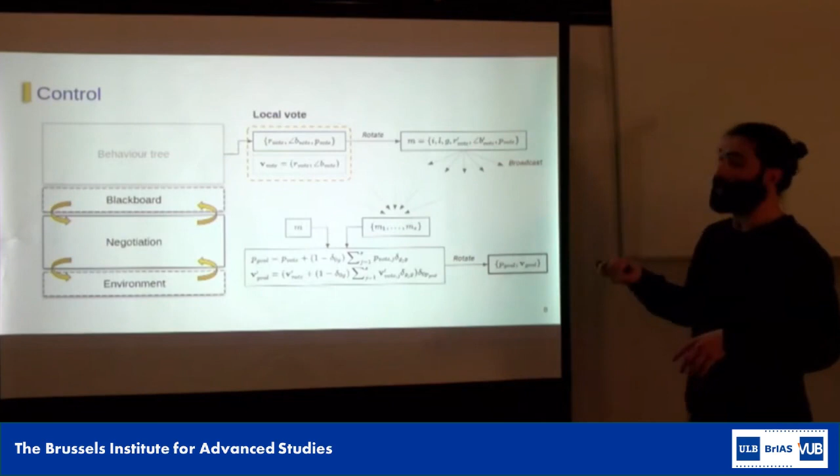Now, what each robot does then is it rotates it to a common frame, which can be obtained through the compass. And then it appends some more information to this vote, like identifiers and so forth. More importantly, what it appends is a group identifier.

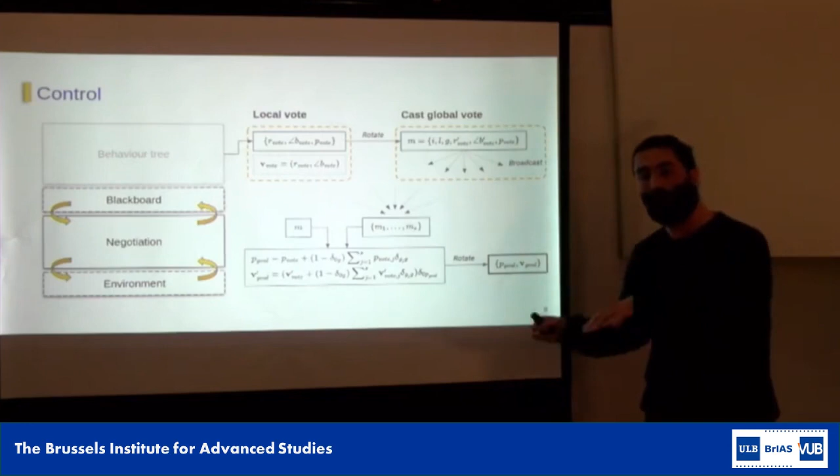This group identifier will have the value of the item under which the robot is placed when all the lifting points of the item have been covered. So essentially what this allows is that the robots within or carrying one single item will be able to coordinate with one another whilst ignoring all the other robots in the environment.

And this is very useful because then the robots can synchronize in order to carry multiple items simultaneously towards the nest without interfering with one another.

So then what they do is every robot will gather all the incoming messages from their neighbors, and then they will do some averaging, and then they will decide whether to move towards a common location or to actuate the platform to lift or place the item. Finally, since this is done in the global frame of reference, they rotate it back to the local frame and they move.

In global terms, it's quite straightforward, but the variables look extremely ugly. So to give a more pictorial representation, suppose you have two items right here, and each of them has two lifting points.

Initially, there are no groups. As robots start covering the lifting points of the items, they start forming groups, and then the negotiation strategy kicks in, and these robots coordinate with one another, and these robots coordinate with one another, but overall the groups don't coordinate with each other. And this is what allows for the simultaneous transport.

Now, obviously what I haven't told you yet is how do we actually construct the behavior trees. So what are the nodes that compose the tree that allows the robots to move around or to lift the platform and so forth? What is actually the control that's happening here, and how do we evolve it? Sorry, I kind of spoiled it there by saying evolve.

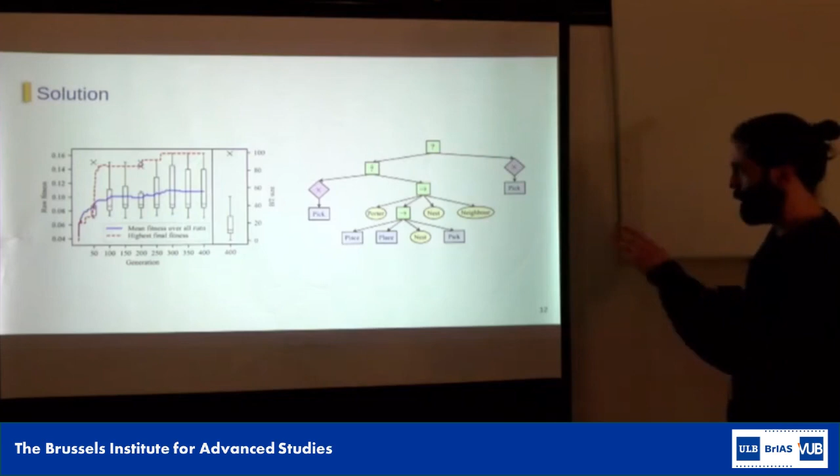The point is that one other thing you can do is follow some mechanical procedures to prune these trees. You can determine that some nodes will never actually be ticked and remove them. Essentially what you realize is that you have two main subtrees. When you apply this and give this behavior tree to all the robots, so each robot has its own copy, and run it, this is what happens.

Essentially what they do is first try to pick an item, but when no item has been found, they just keep moving in a straight line until eventually they might find the lifting point. Once they do, they try to pick the item, but since they might not have enough porters, they just wait until enough porters have been recruited, and then they will try to place the item, moving towards the nest and dropping it there.

Essentially what this behavior tree achieves is that the robots can explore the environment and locate the items without any global information or previous knowledge about what the items were in the first place. Then they can form groups under the lifting points and simultaneously carry multiple items towards the nest while also avoiding obstacles in their path, which at the time we did this was rather novel and rather neat. So that's what I wanted to tell you guys about.

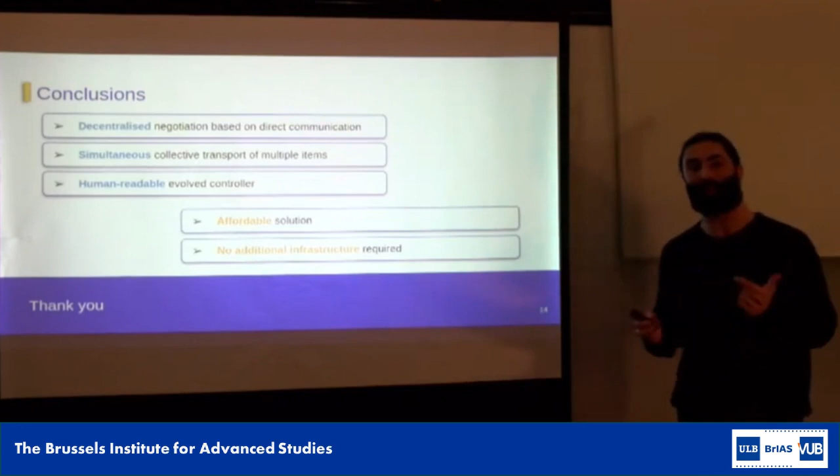No, as in yes, but no. The coordination is only between the group, but the communication actually happens all the time. Each robot is broadcasting the message it has constructed with its own sensed information, and it's only upon reception of messages that contain the same group identifier as their own that they use that information to coordinate. But every robot is constantly broadcasting and constantly receiving messages from the robots in their neighborhood. So the communication is always happening, it's only knowing when to use that message for coordination that plays a part.

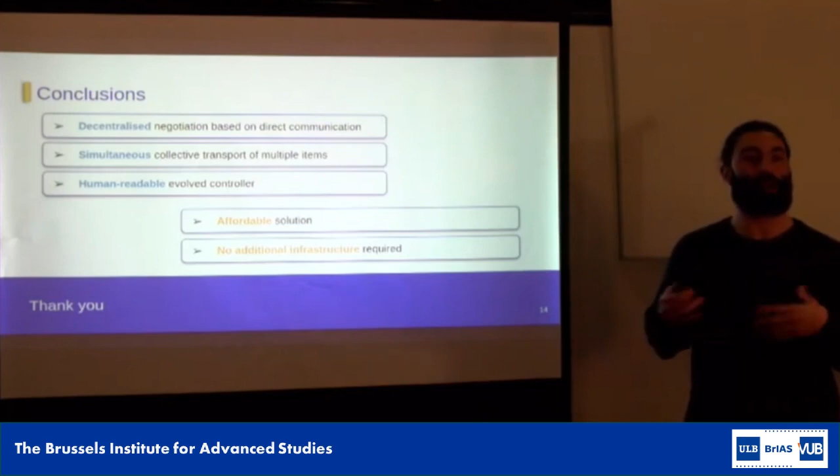Because it looked like in the simulation, when they found an item to carry, they didn't really call out to have someone come help.

Indeed, and that's because the controller actually never used the recruitment behavior that we had provided as a possibility. Here we did define some recruitment and anti-recruitment behaviors, so we made it possible for the controller to use these behaviors. Essentially, a robot could sense if one of its neighbors was waiting for porters and then move towards them in order to find the item. But then the genetic programming algorithm decided this behavior was not necessary to produce control software that actually worked at the task at hand.

We were not really forcing them to use this, we simply provided it because we thought it would be a good candidate solution that some controller might find use for. And did you do a test to counter-prove, or use another behavior tree with recruitment?

It seems like the first thing that comes to mind. So I did not particularly do any manual tuning afterwards to see what would happen if I swapped behaviors. The whole purpose of the automatic procedure is to avoid this, because often with swarms you might think intuitively something should work, but then you try it, and the problem is that robots in a swarm experience a lot of unpredictable interactions. You move, run into another robot, that one reacts in a noisy, unpredictable manner, and then it runs into something it shouldn't have. So this all blows up rather quickly. Even if you think a certain modification will work, that's not necessarily the case. I was actually a bit disappointed when I saw the solution didn't use any of the fancy things I had given it, but it is what it is.